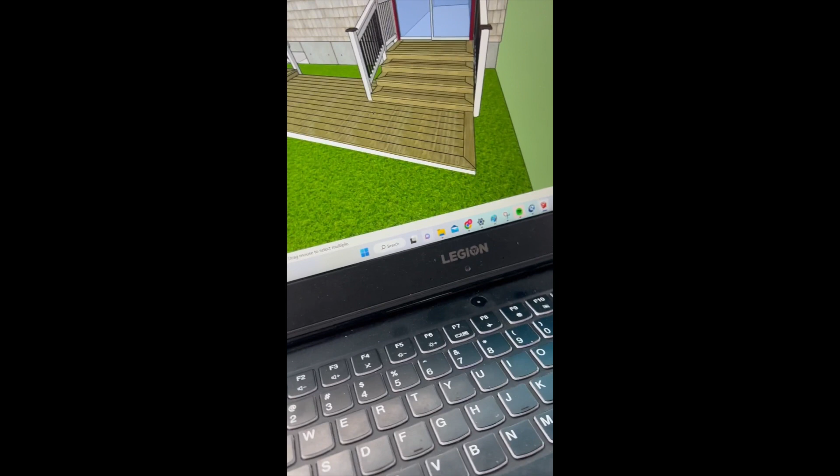This morning, what I'd like to do is get our frame in for our stairs, and also put in some hardware in our ledger right over here. But what I'd like to do is get these guys framed out. So my customers, they don't want to deal with a very big step, and for health reasons and safety reasons, we want to make these treads a little bit smaller. So this is not something you could buy at your Home Depot or your Menards or wherever you're getting your stringers from. But this structural member is called a stringer right here. This guy right here.

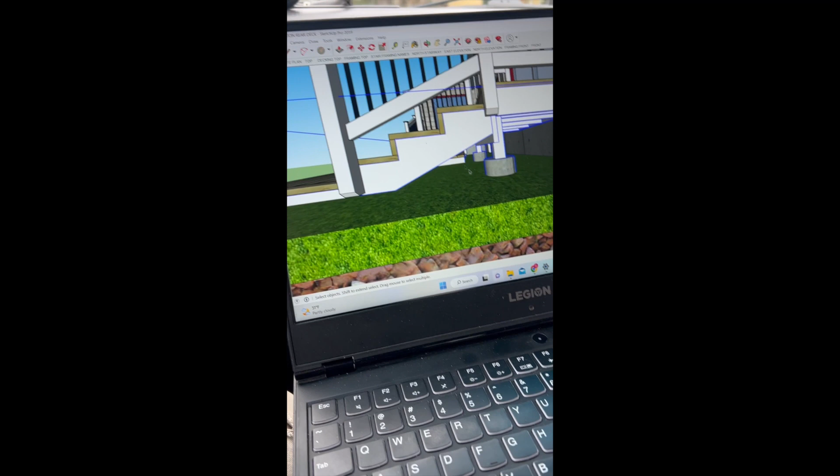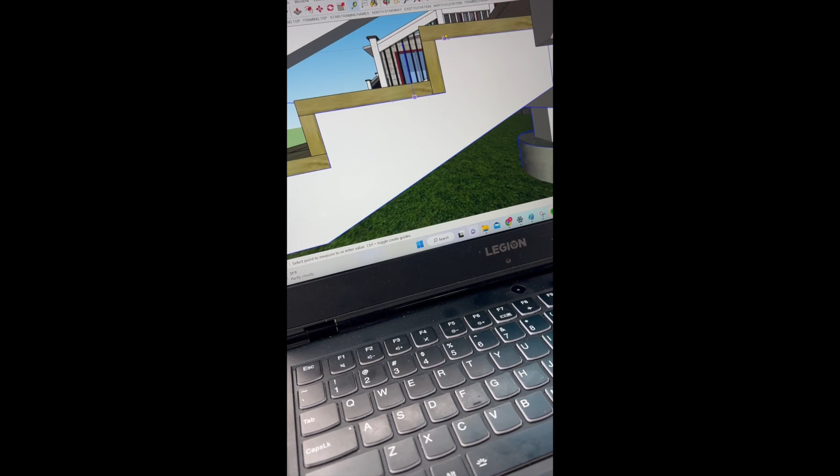It's actually a 2x12. So our run, where we're going to put our steps, is exactly 1 foot 2, which is 14 inches, and then our rise is extremely small too, 5 and 9/16. That kind of changes here and there, but I'd like to make them exactly the same on the other side of the deck, so that when we go and put this together, it's going to have more continuity.

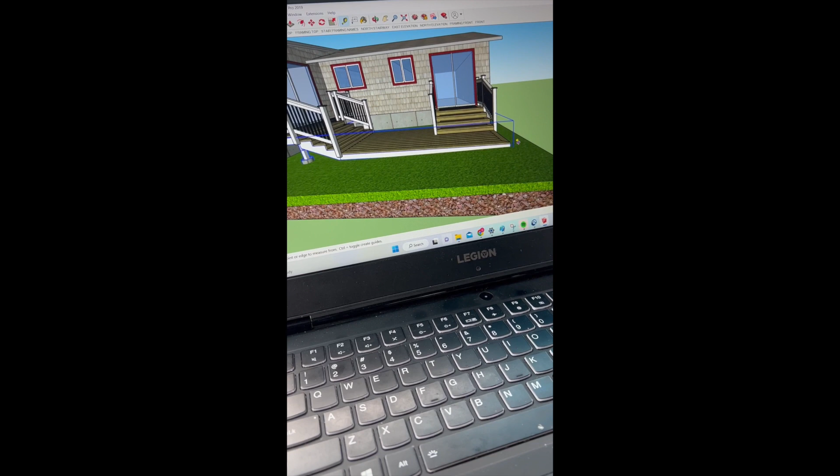Also, the ground slightly slopes this way, so it goes uphill this way and slopes that way. So the bottom of our deck is actually going to come in and kind of get entrenched into the ground, and we got to see where that actually ends up to make sure that we're not going to accidentally miss something there. All of these steps also have picture frames, so the edges, you don't see any edge grain at all. All you see is just straight up decking, right? No fascia, none of that.

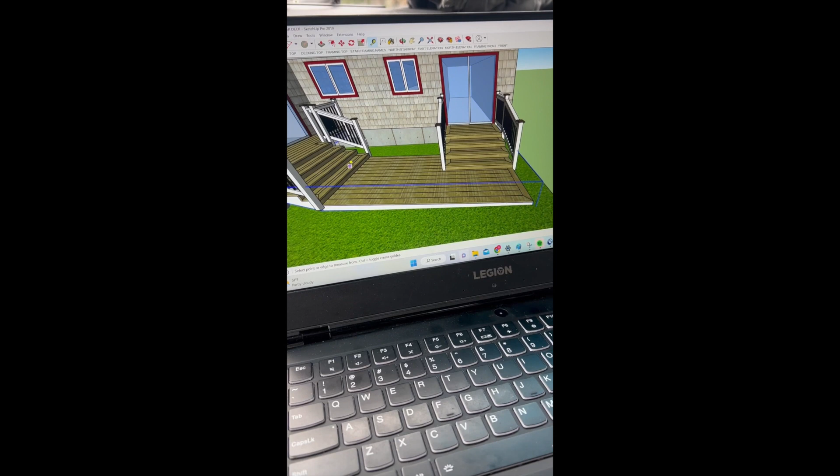So we're going to be doing these picture frames in here, but we got a frame at 14 inches wide, and check in. Yep, 14 inches wide. Let's see what we had the rise at over here. 5.5. So 9/16 was more of an estimation. I think my program was pulling off a different edge line there, but we're gonna go ahead and get that framed up this morning, and then we'll deal with this lower platform here in a second.

But I would actually like to figure out where this elevation's gonna end up. I don't want the deck boards to be below the ground. That's gonna be quite an issue. So we'll cross that bridge when we get there. And yep.

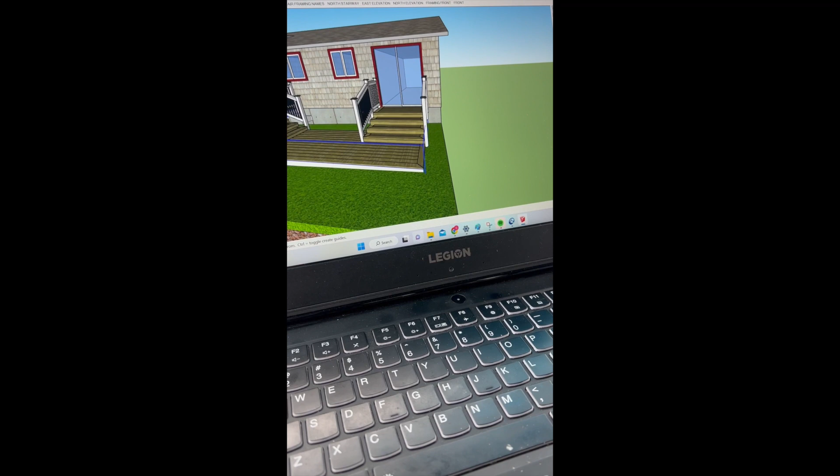Whoa, hey bud, whoa. I'm just kidding. Just getting naked over here. Putting on our ATGs for the day. What's this? Pre-used. Pre-used, yeah. Unwashed. Oh, that's disgusting, dude. That is nasty. Vincenzo always brings his second pair of clothes, isn't that right? Yeah. I ain't gonna be in these all day.

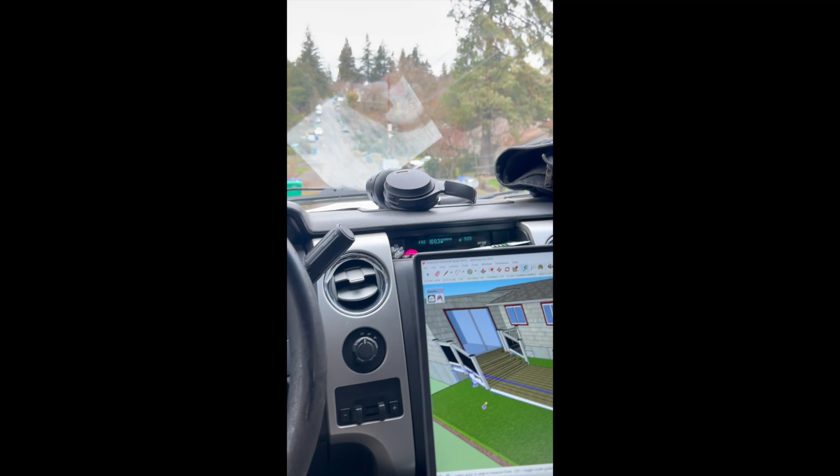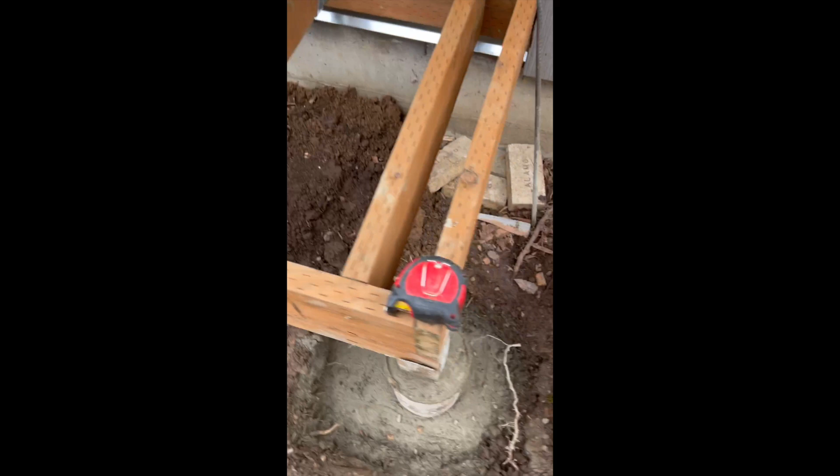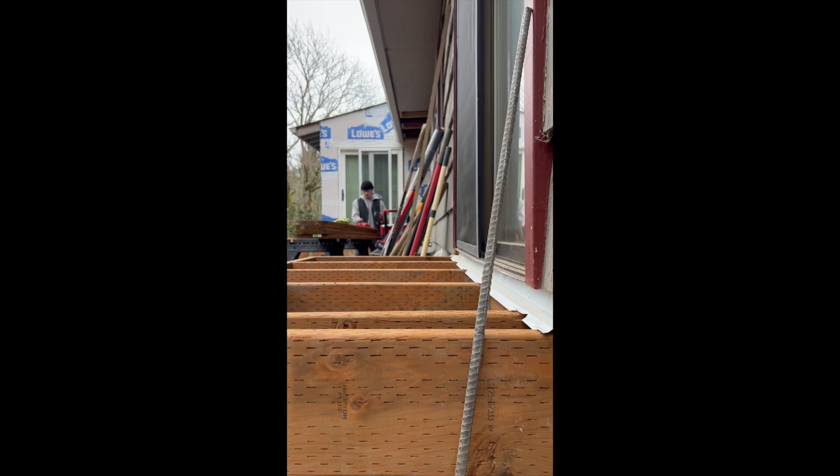Okay, we're gonna start doing these stairs. So, we're dealing with a bit of a slope from this level all the way over to this landing over here, but I already knew about that before designing the deck. So what we're gonna do is frame out accordingly, and I'm hoping that this level right in here and this landing here is the same as the landing in the back over there.

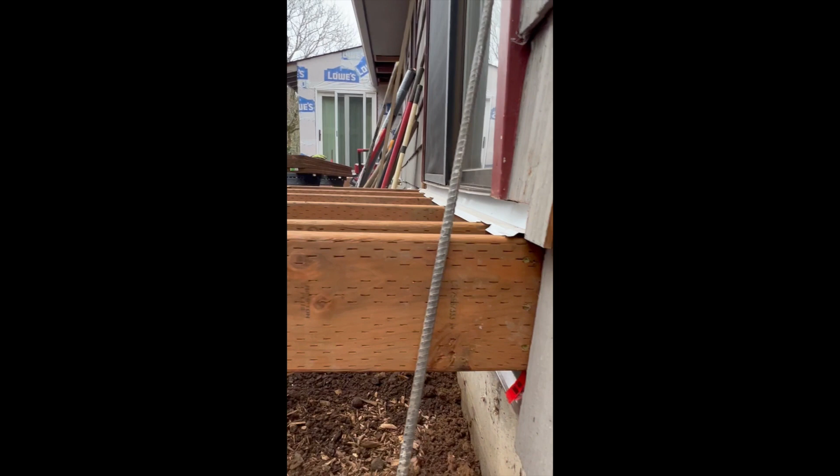I'm pretty sure. I mean, if you pull a chalk line, there's a little bit of a whoop-de-doo in there in the siding, but over the course of 35, 40 feet, a quarter inch or a half inch, you're not going to be able to see it. It looks pretty dang near perfect. Framing is not an absolute science, as everyone in the framing industry knows. Not an exact science, and I take my time to nail those in to perfection, and their job is super easy.

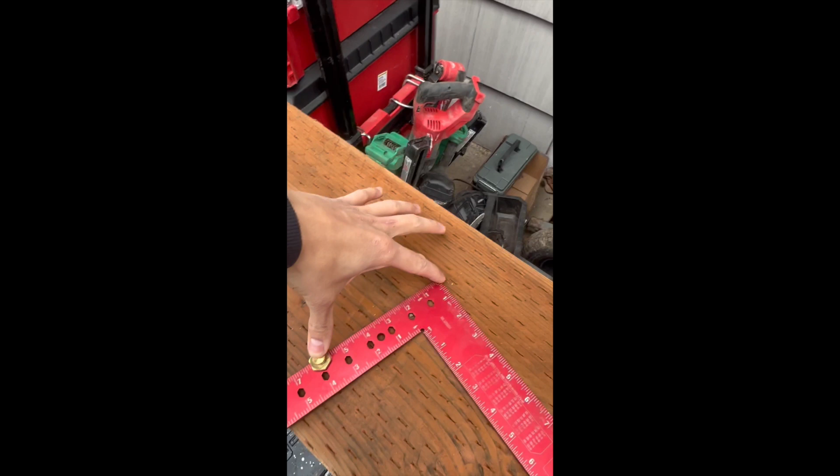So according to the plans, it's 5.5 inches each step. The height, the riser is 5.5, whatever the heck you want to call it. And then from the tread, we're hitting 14. 14 is the number I came up with just because a regular tread's actually 10. So we're getting an extra 4 inches off the top, this is pretty insane. It's actually a very large tread.

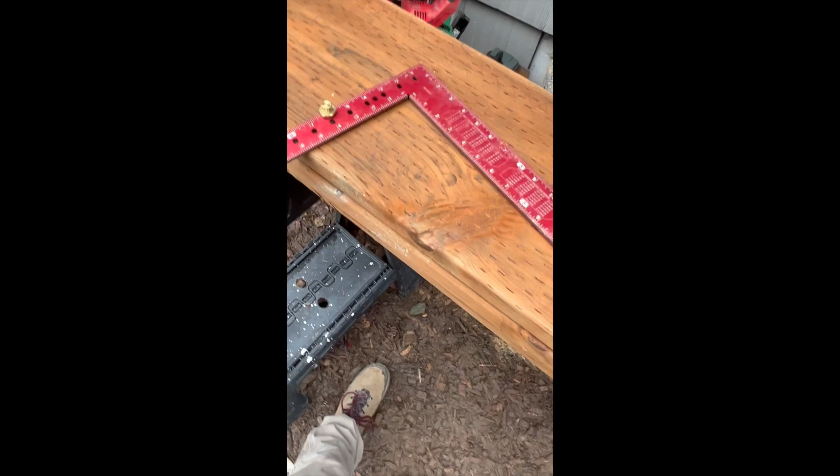These are some brass knuckles. I call them brass knuckles. They're not actually that. They're hexagonal nuts that I set at 14 and 5.5. And you're going to go into your stack of 2x12s for your stringers and find your straightest guy. So I went ahead and found that, and I'm going to locate my first one here. The first thing that you want to look for is knots. That's what changes the straight shape of your stringer.

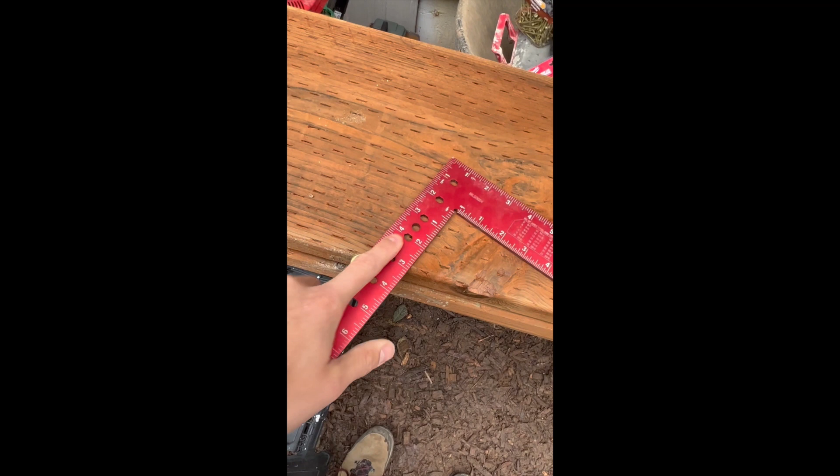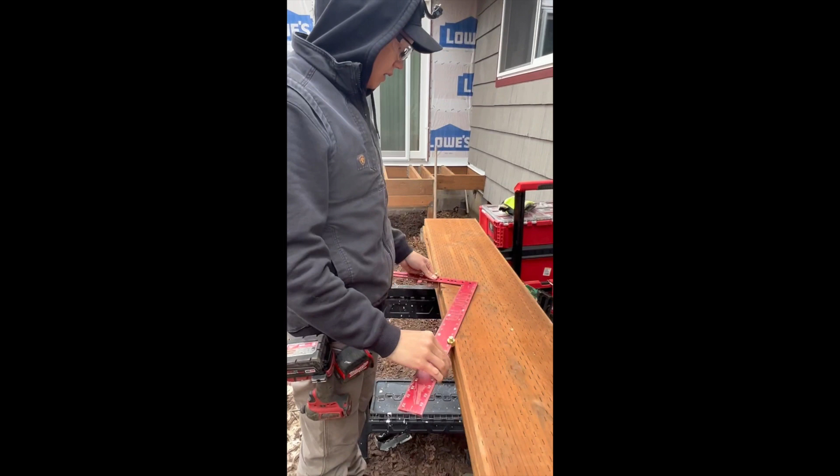So just go ahead and find that, and put your triangle, your triangle for your rise and run, over your knot. Find some place you're going to cut it out. And when you cut it out, it'll help alleviate any sort of discrepancy down the future. Sorry. I'm going to find this guy real quick, and I found the knot. It's right there. I'm going to do a quick locator.

No, that's too permanent, man. Did I just set down my pencil? This guy's losing his pencil. All right, back at it again.

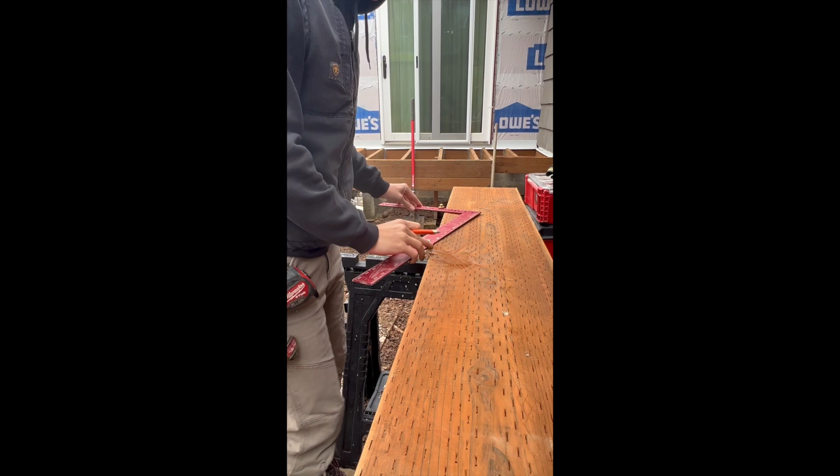Found my first knot. I'm gonna put a quick locator. I'm not actually gonna pull it all the way through. So I've located one of my potential steps, but I don't know if I'm actually off or not. So I'm gonna slide that up. Make sure my knuckles are in the right spot here. All right, you can see how much this is off by, but we're having some waste in here. And ideally, I do not want to waste.

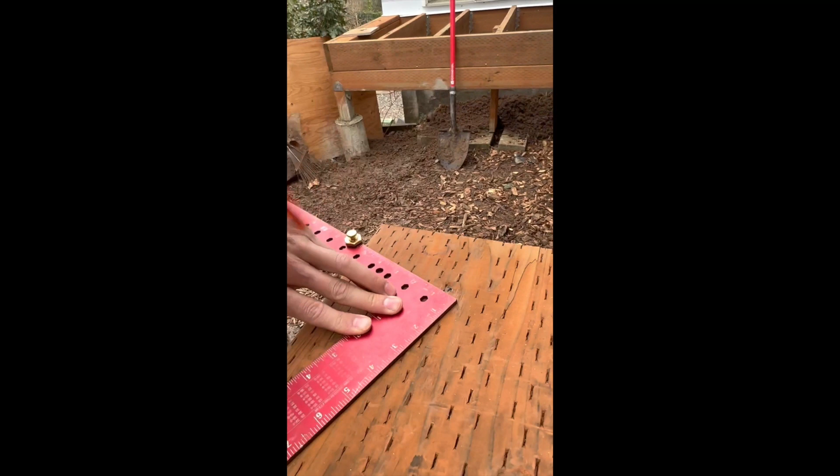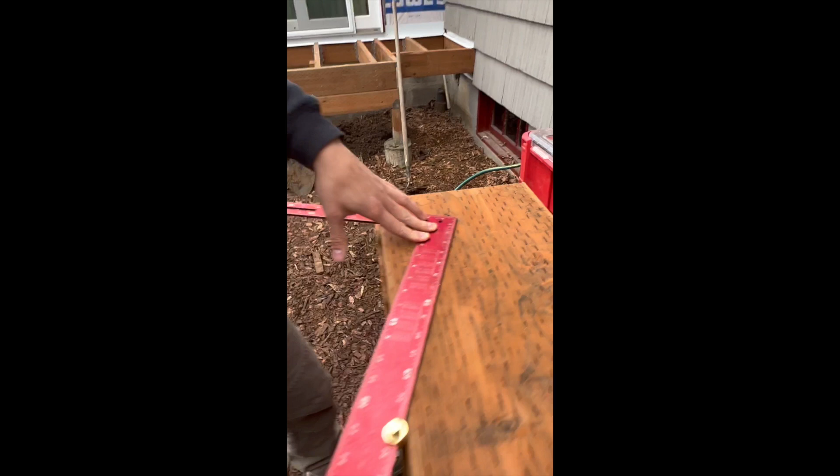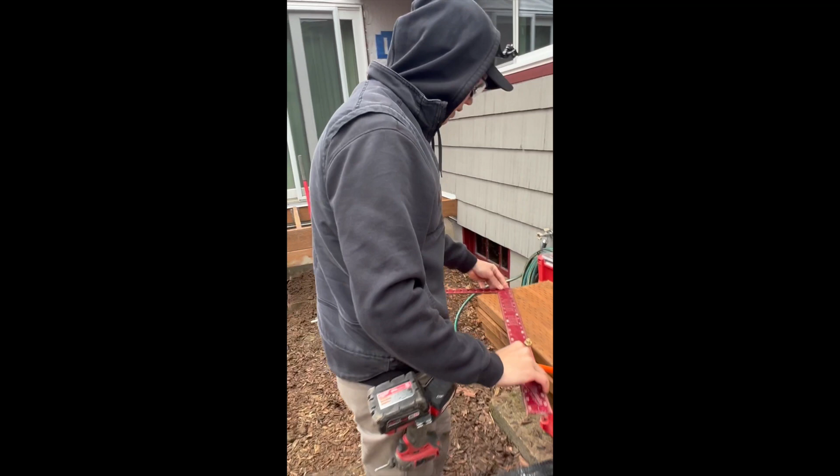I actually want to bring this corner that I'm drawing in right now. I want this corner to be right here. So how much does that offset us? Enough that if we were to cut this, we could actually still cut out the majority of this. So I'm gonna slide this guy all the way to the end here. And you can see that my other side is actually off the table. This is not good, because now your first step is off.

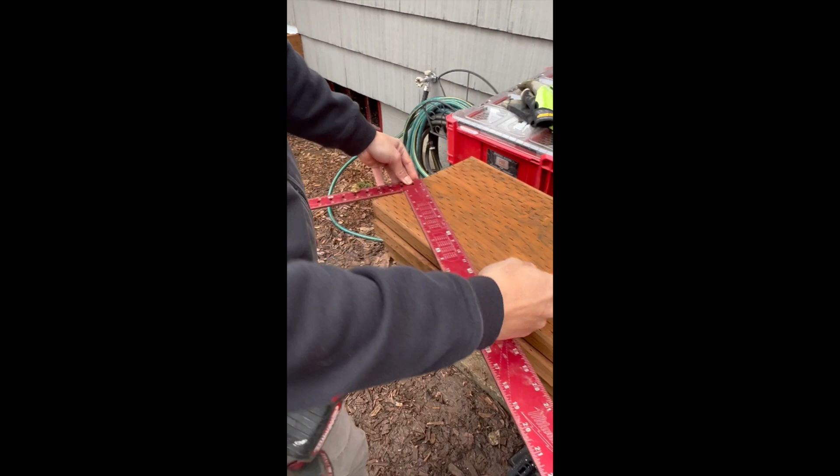But I do know that I want my first end of my tread to go right here. That's usually your first indicator, right? So I'm gonna pull this back. I wanna put my first tread right there.

Right there, we're nice and tight. Draw that in. We're gonna see how that lands up on our knot. And usually you have more than one knot, so, you know, go whoop-de-doo. See, we already cut through the majority of our first knot. So that's great. I'm gonna go ahead and line up my knuckle again.

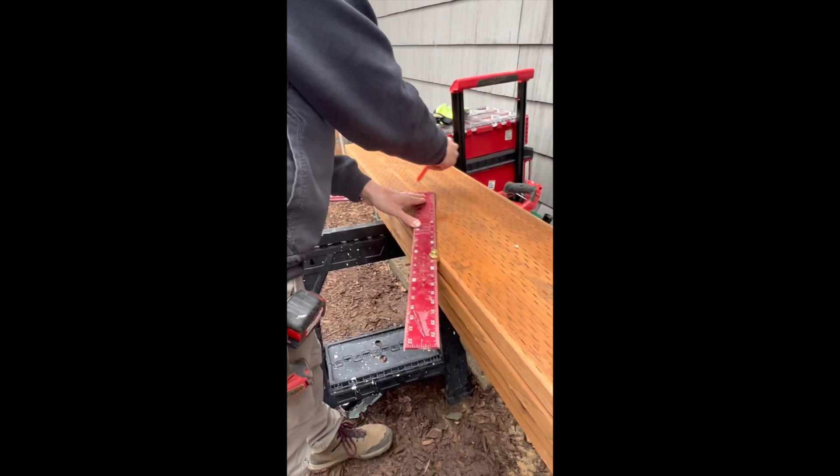Now, I understand that there's much better ways to do this if you wanna use wood clamps or whatever the heck you wanna do. But I honestly prefer this because I'm always on the road. And this actually turns out to work very well. Do another one. Consistency is key.

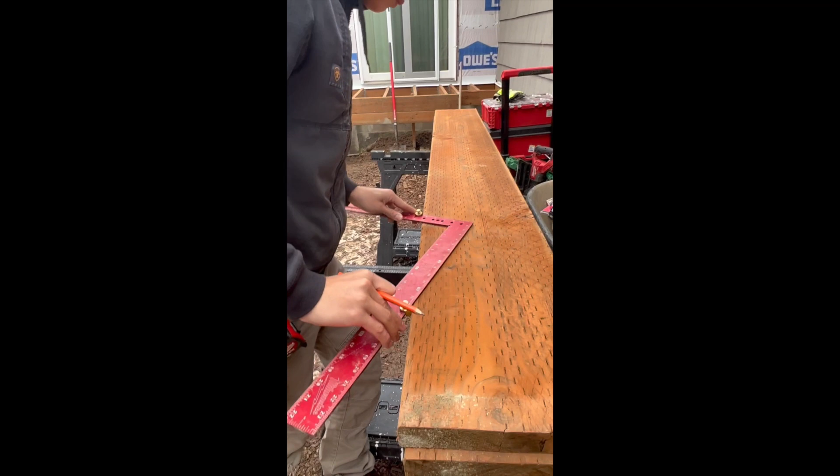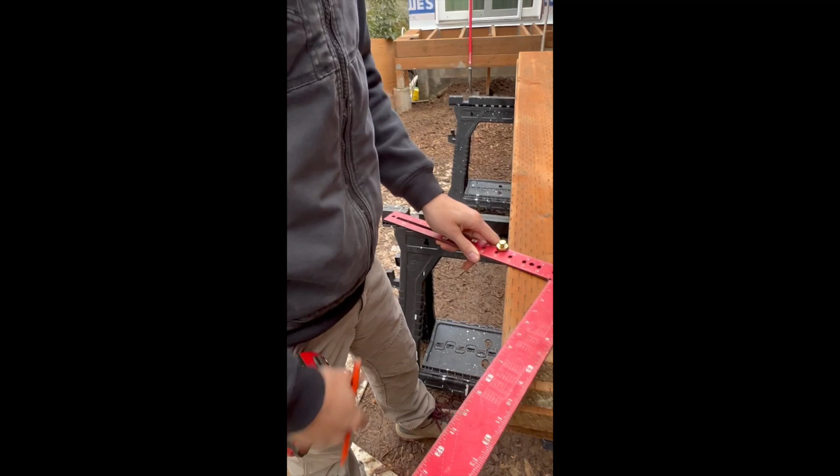You want to make sure the same guy marking it is typically the same guy cutting. And I can tell you why here in just a sec. Okay, my other end is off the table. Bad news, Billy, right? No bueno. So what I'm gonna do is I'm gonna go ahead and take my knuckles off.

And you can honestly take your knuckles and you could actually hook that on the far side, just like this, and you'll get the same exact angle and it'll be parallel to this guy. I don't really like doing that for a number of reasons, because the knuckle is different on the other side. Line her up. Right there. Perfect. We're locked in. Mark my end of my tread here.

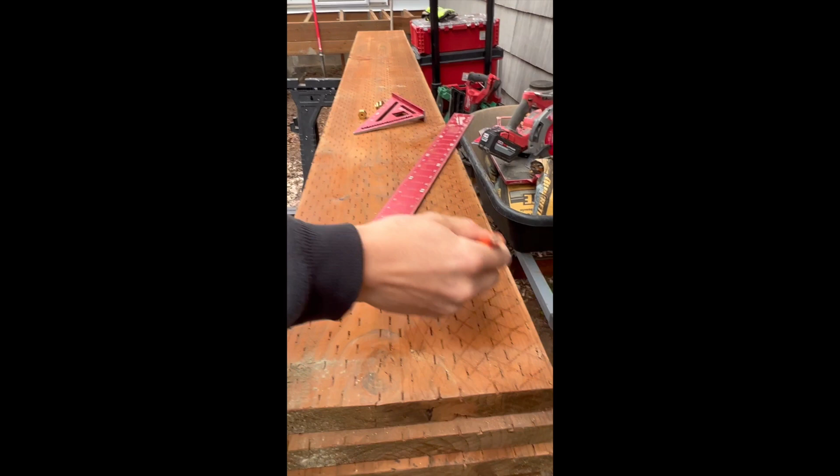And my end of my tread is actually gonna be 5.5 inches. All right. 5.5 right there. So you carry that back, you then have your tread. However, I'm actually cool with just cutting this all the way off, and we'll worry about this later. Sometimes this actually plays into your posts a lot better, and I actually put a kicker board on the front of these guys too.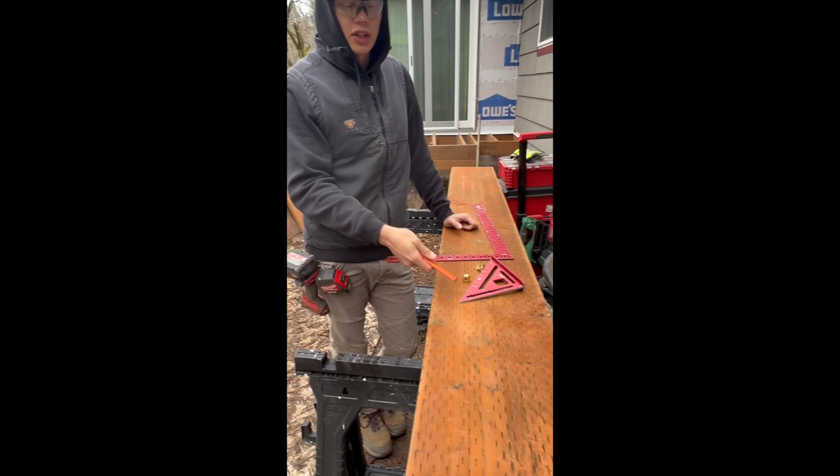So 1 step, 2, 3, 4, 5, and 6. So we made 6 out of 1 8-footer, which is perfect because we got to do 3 per. So we can actually get 2 treads. We get 2 stringers out of 2, left 1 board, right? So we can get a grand total of 8.

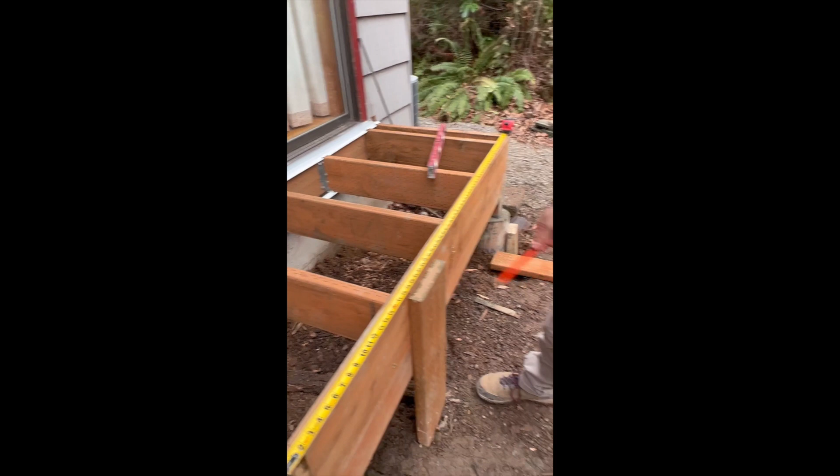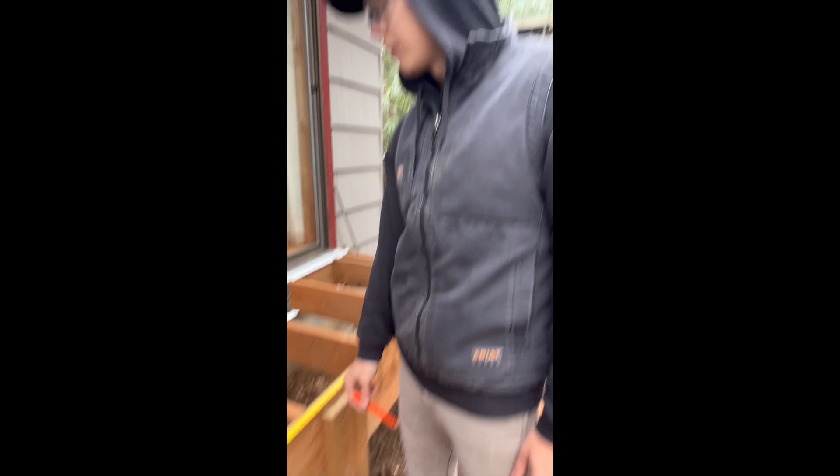I honestly don't like spacing stringers 24 on center. We might actually just go to the store and go get another one. So then we'll actually be spaced at 16 on center. So my mistake. We'll go get one more at the store and we'll get that all fitted out. But in the meantime, let's get cutting.

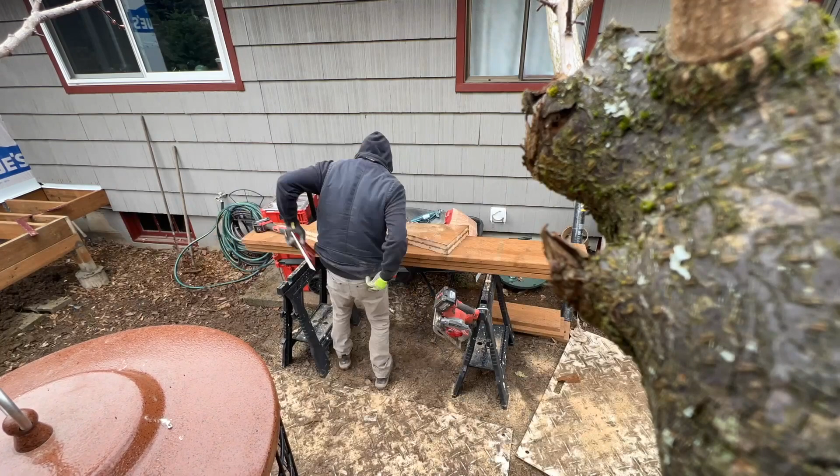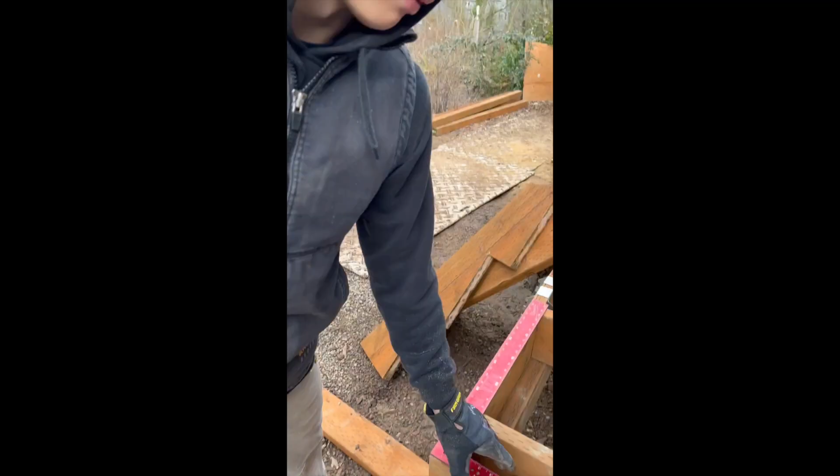We're just gonna square up this deck like we said yesterday. I intentionally didn't hop these brackets in just yet, just because we need to do some minor details. So you can see right here, I'm gonna go ahead and true up this side with a corner. And we got about 1/8 to spare over here. So that means that this side needs to go that way.

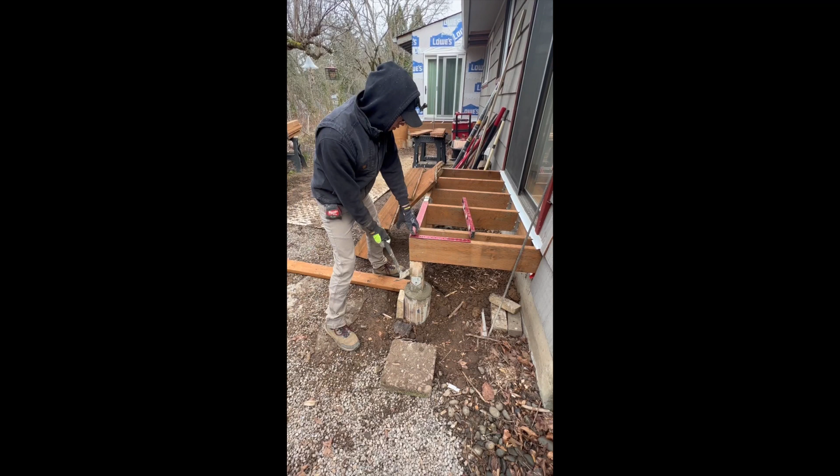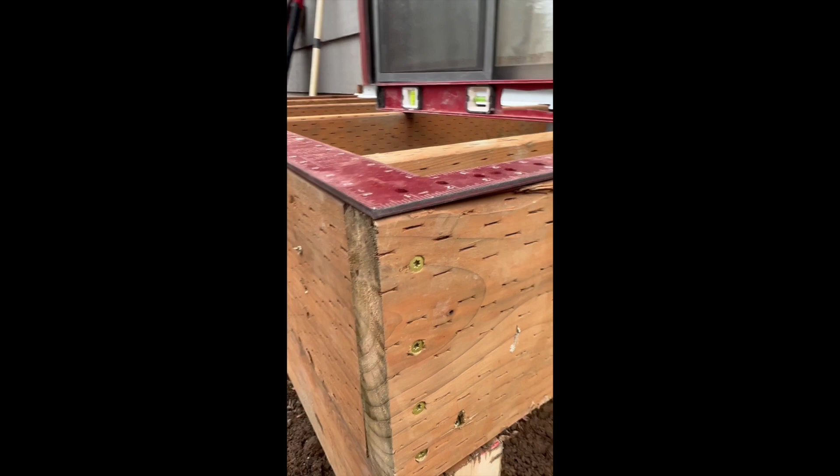There. Perfect. And I already checked the ledger and it's square with the house as well. So we are 100% square. We'll knock these suckers in, call it a day, with like 1.25 inch nails. Fire in, dude. Clean her up. Going right through this.

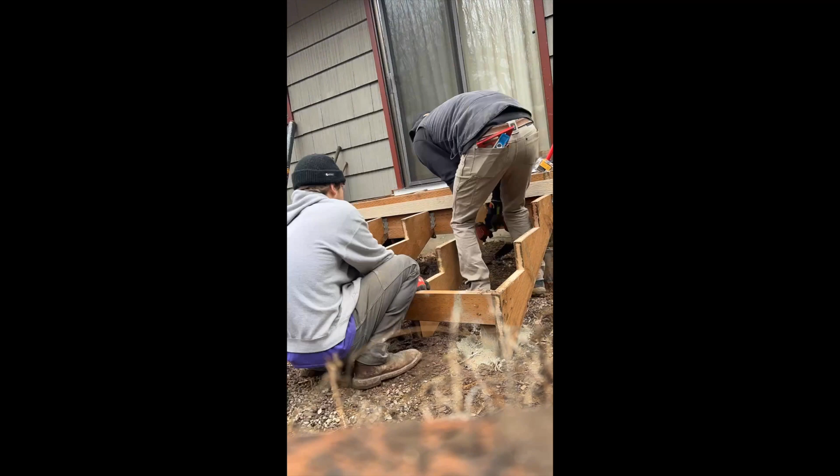Just doing this one for the gram. I'm just going to show you guys quick.

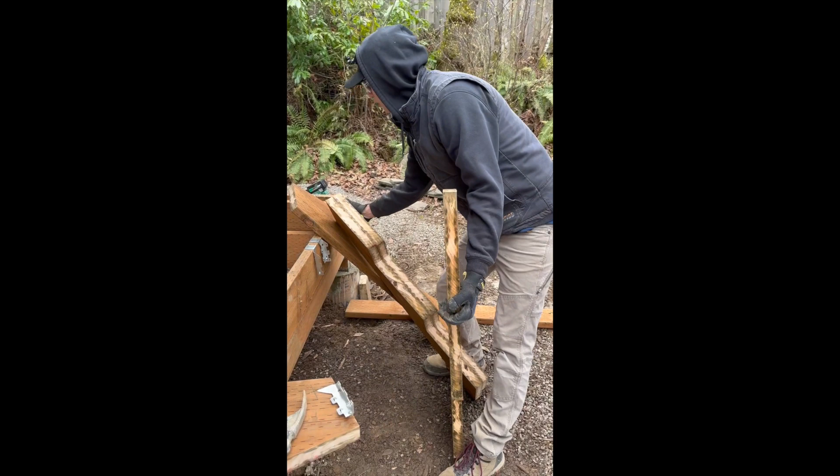If you don't have stair hangers, the LUS that Simpson makes, they pulled them out of circulation in certain places, so good luck finding them. This is a replacement idea here. So pretty much, here's your stringer. You want to attach your bracket right in here, right on the back side, because this part is in tension. Let me show you guys how to do this real quick.

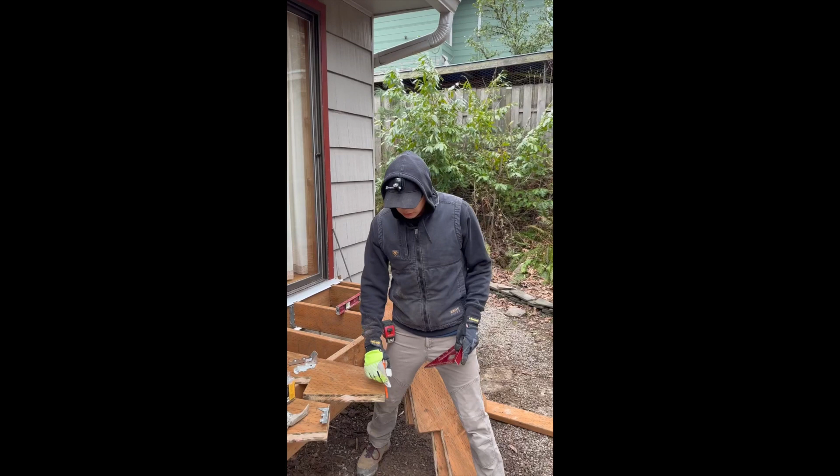So you can use a 2x6 or a 2x8 bracket. You can use a 2x10, but it really depends on your riser, your height of your step. But all I'm gonna do is come down to my foot right here on my stringer. I'm gonna come down 5 3/4 because this is a 2x6, 2x8 hanger. I'm gonna score my line right there. I'm gonna come down on the side here and mark in 2 inches. And mark in there. And then make a perpendicular cut right here.

Up to 2 inches right there. And that'll make space for our hanger in here. You might say, well, Gabe, as soon as someone steps on this step, it's gonna crack right here. And I couldn't help but agree with you, because I just made a relief cut essentially. But let me show you how to avert that.

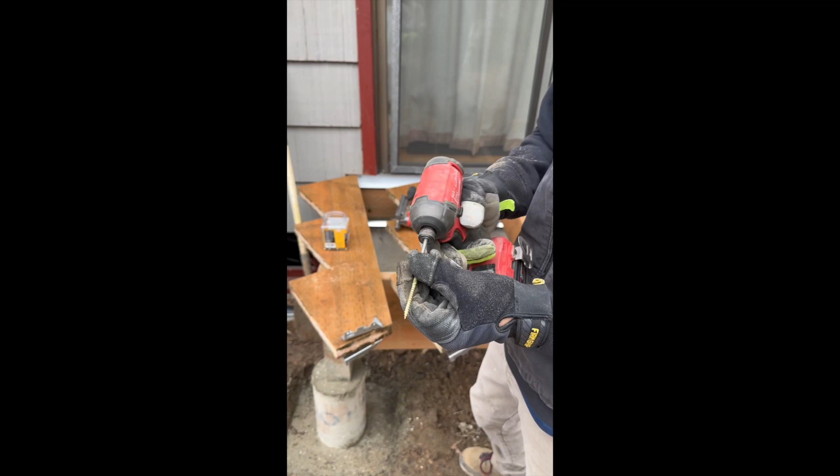All the way in, that's gonna help set our elevation with our hangers. Take a number 10, 3-incher screw. Screws do really well in tension. So if we put a number 10, our score line is gonna be right there. So if it splits, it's gonna go right there. I'm gonna put a screw right through it. Not through the steel, but through the wood.

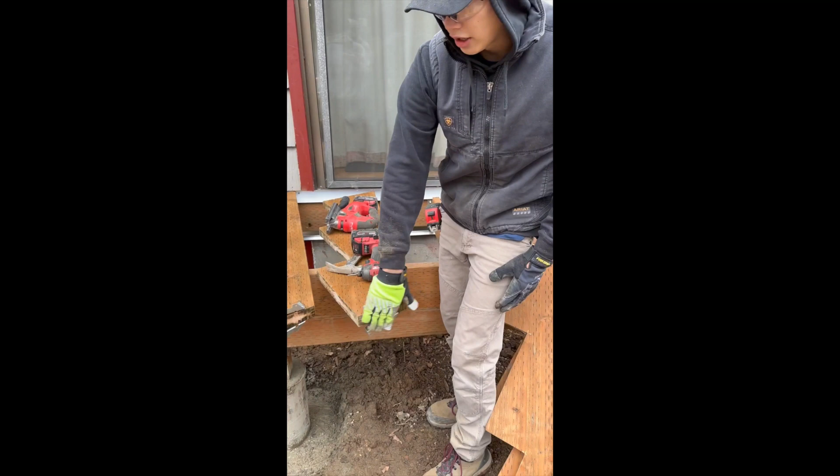And go ahead and sink it. So now I've got a screw in here. You can put 1 or 2, whatever fits your needs. But now I got 100% flat surface in here. And we're ready to mount.

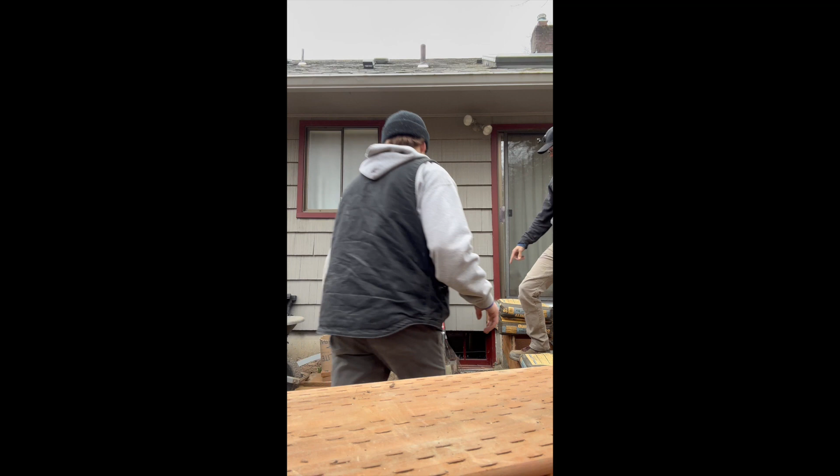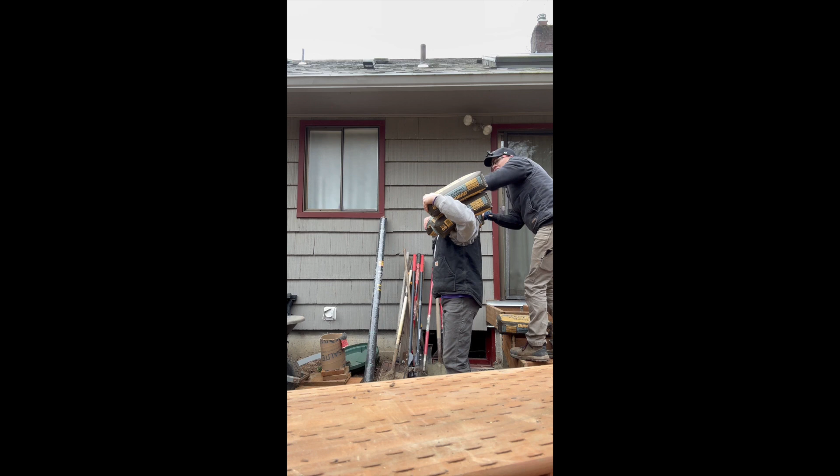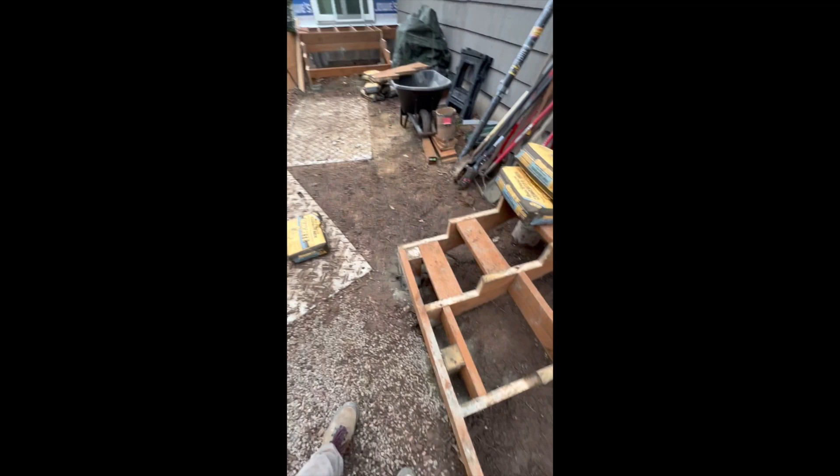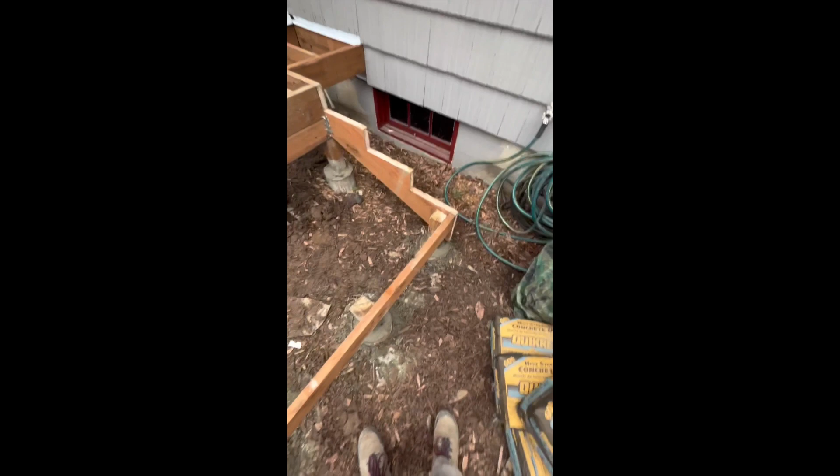What? Okay, we're back from lunch. That was a little bit of a long one, but we got some of the things we want to do and who can carry more. And then I lost an arm wrestling match. I gotta get better at that. Yeah, I gotta get better at that. I gotta whoop them next time.

So where we're at right now is we ran out of stringers. We left one as our template, and then we're gonna cut it out of an 8-footer. Get 2 more of these guys, so we can get 3 total in the middle of the 6-foot run.

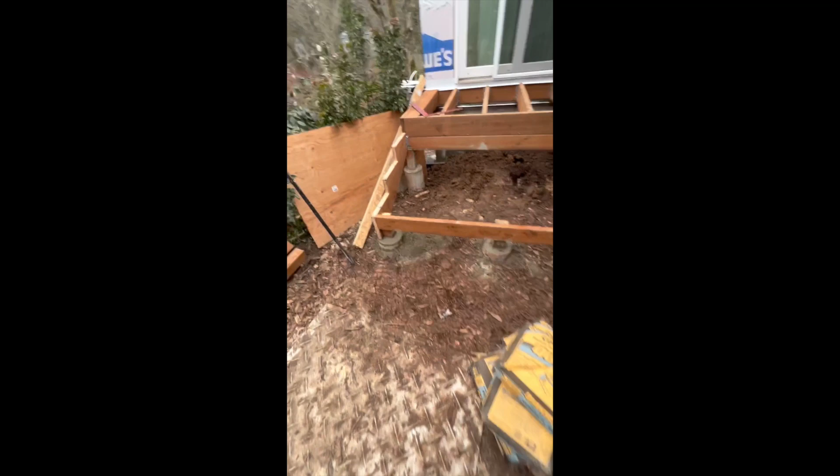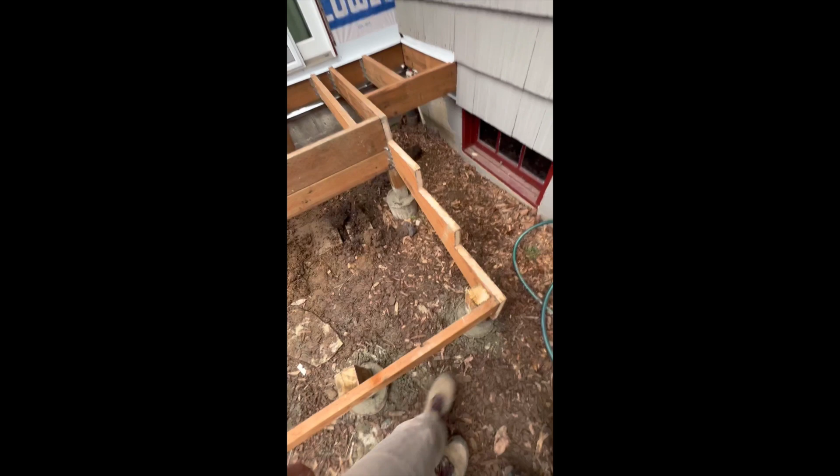Little known fact, when you span more than a 6-foot opening here, which this is 1/2 inch under 6 foot, or 1/4, so we fit in the guidelines, you need to have an intermediate handrail because the walkway is too wide, you know? So we're gonna go ahead and cut those out. We're gonna knock that out real quick after Vinny gets done doing whatever the heck he's doing. And then we'll catch you up on the time lapse.

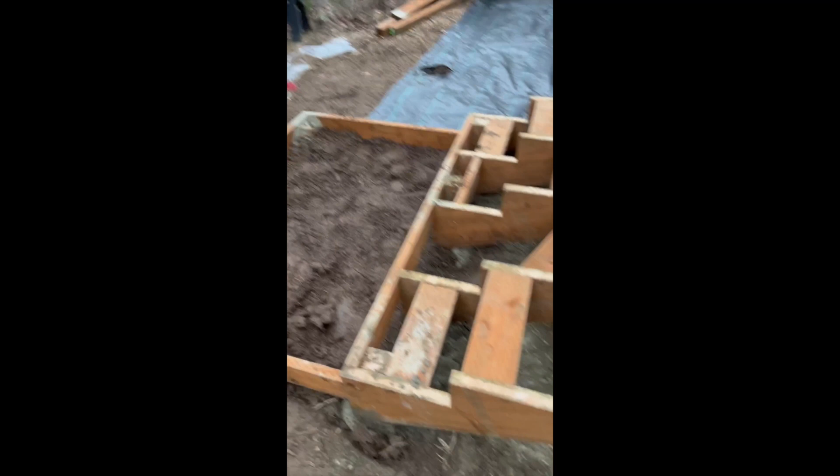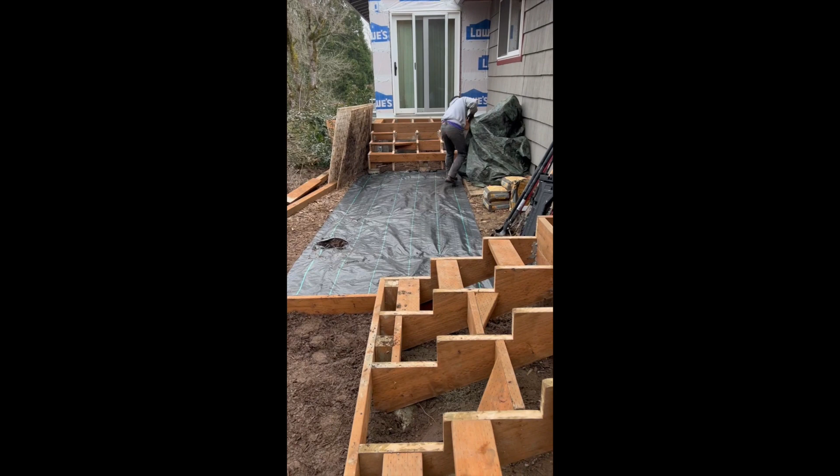Today was a long day. Let me show you what we have going on over here. So we went ahead and finished the stairs. That took a little bit longer than I expected. We finished out, but we didn't have enough lumber for the other side, all those stringers over there. So we went back to the big box store and got some lumber.

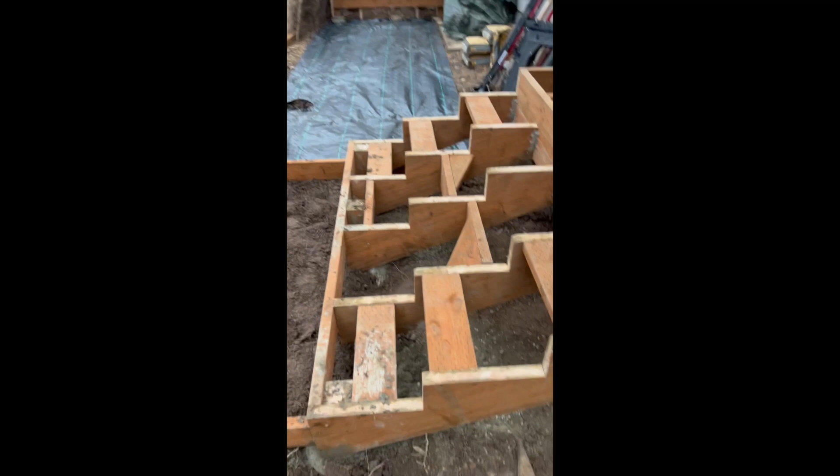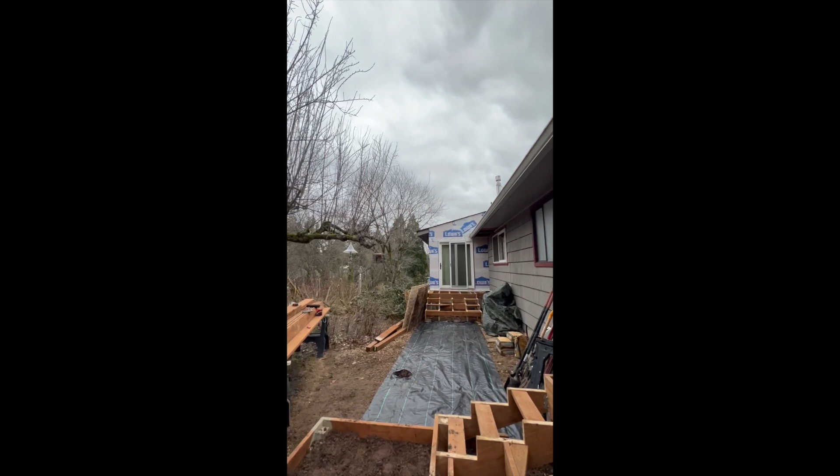It's not necessarily to protect against vapor, it's more so plants. It's more of a landscaping fabric, if I'm being totally honest. We'll line this a little bit later for this little box, but Vinny's going ahead and cleaning up. And we're gonna head out of here, and hopefully we'll get some nice weather tomorrow. I can't really say this is nice, but it's overcast, so at least you're not beaten down.

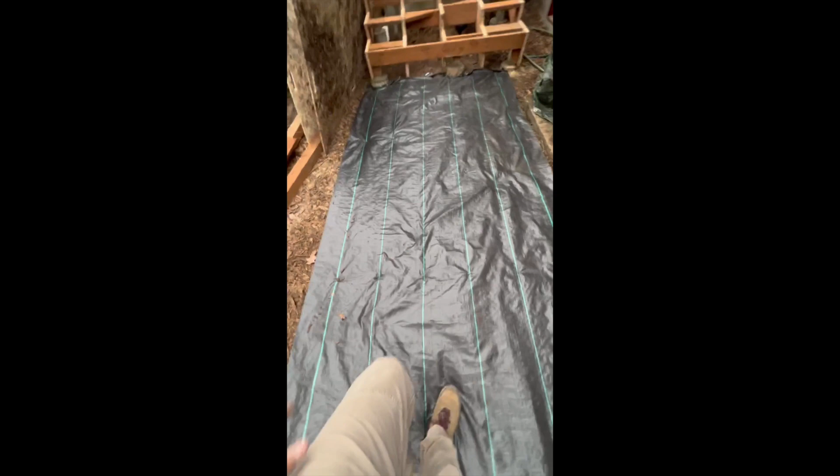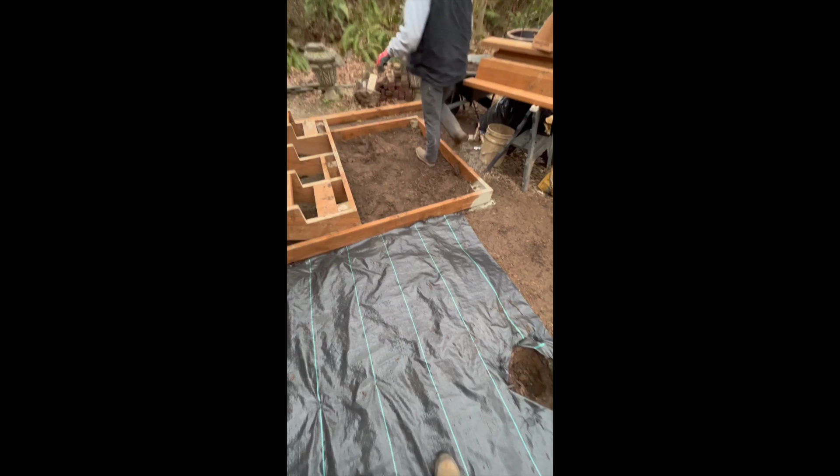We are a little high over here, so we actually decided to carve that out a little bit and get it ready for some joists to go in. I'm gonna frame this bottom area with 2x6. The rest of the landings are in 2x8, just because they're suspended much higher than the ground. But I anticipate a little bit of carving over here, where we actually have to trench a little bit of dirt, because this side of the yard is much higher.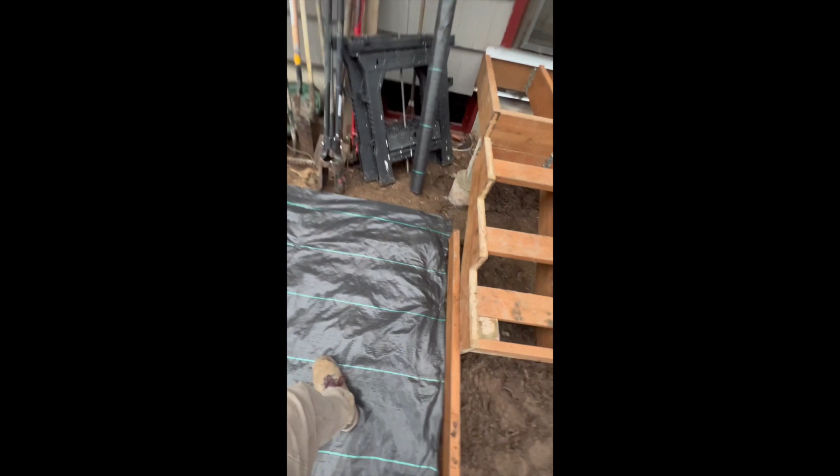In here, I was trying to figure out, I want my deck boards to go this way, from here to there, lengthwise with the stairs. But getting members in here that are properly held up, I might even have to go the joist hanger route and set pretty much another ledger on the bottom, which is totally an option. I just haven't crossed that bridge yet.

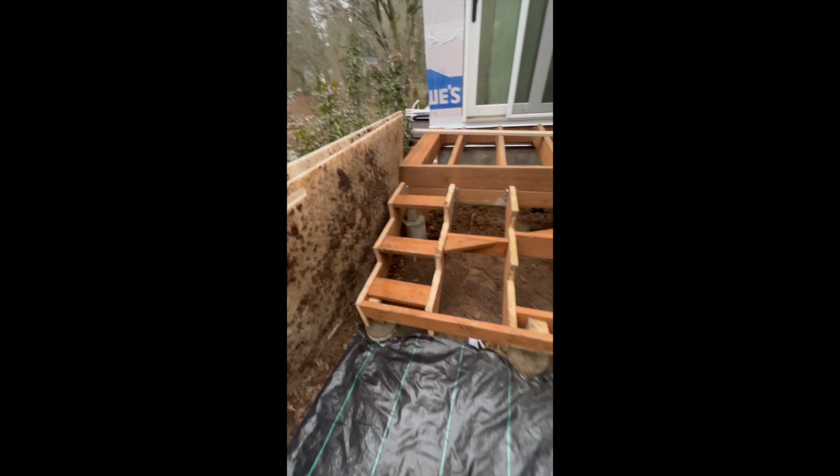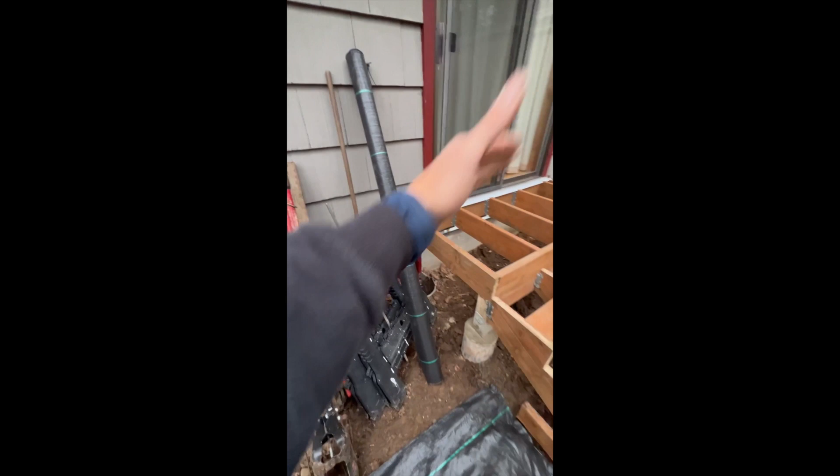Every deck is not exactly according to the design to the inch, but compared to some of the more complex jobs, this one I would probably give like a 3 or 4 out of 10 in terms of difficulty. It's just a bunch of squares if you really think about it. But the house is not square, so I kind of have to play with that. And this line of ledger is not perpendicular to that ledger over there.

We're taking our time on this deck. We're not really in a hurry, chop, chop. But we're making progress, though.